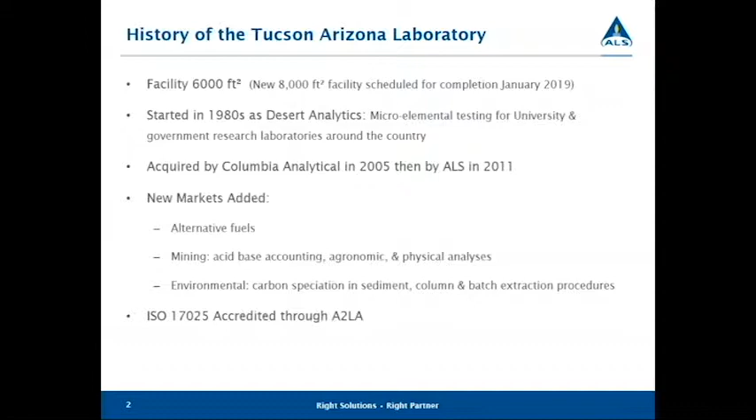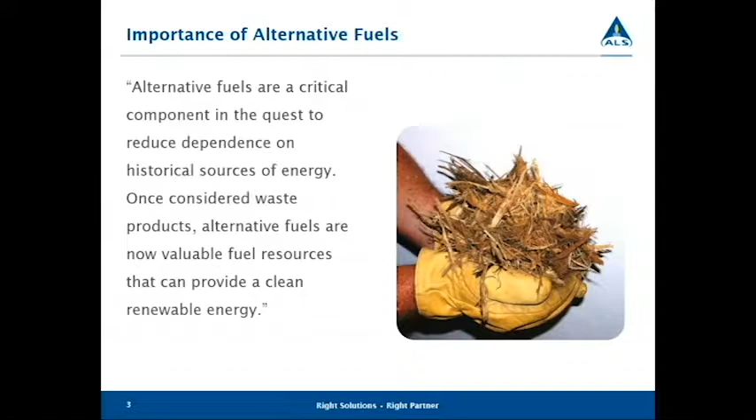Well, first of all, the importance of alternative fuels. You probably hear about this on the news all the time, but alternative fuels are really critical to reducing dependence on historical sources of energy like gas and coal and hydroelectric. One of the benefits of alternative fuels is they were once considered a waste product, but now they're being used in a productive way. Another thing is they're considered a clean, renewable energy. In the case of biomass, even though when it burns it gives off carbon dioxide and particulates, the new material that replaces the burned material is absorbing that carbon dioxide.

So here's a slide showing biomass to electricity. Biomass to electricity is only about 1 to 2% of the total electricity generated in the United States, but you can see the growth over the years. It really started taking off in the late 80s, early 90s. And you can see some of the other countries around the world, Germany, China, Brazil, Japan, are all starting to increase their generation of electricity by burning biomass.

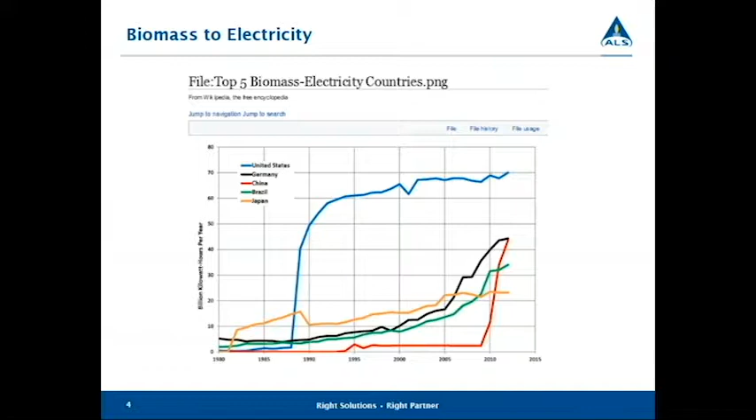Another way to generate electricity, and this isn't included in the biomass electrical generation, is municipal solid waste to energy. As of 2016, there were 71 plants. Most of these electrical plants are in the Northeast and Florida, and most of them are called mass burn plants. So they're not doing any sorting of the municipal solid waste that they get in. They have grappling hooks that just pile the waste material onto a moving conveyor belt that feeds the waste right into the furnace.

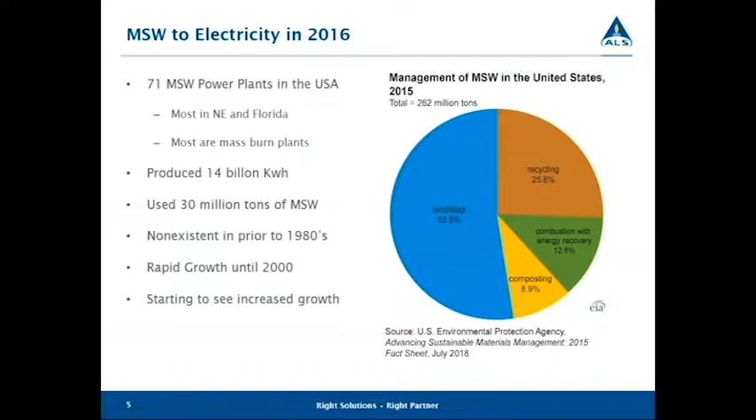In 2016, they produced 14 billion kilowatt hours of electricity. They consumed 30 million tons of solid waste. Basically, this industry was non-existent prior to 1980. It showed real rapid growth until 2000. It started to slow down, and they're starting to see an increase in growth here in the last couple of years.

So what is an alternative fuel? Basically, an alternative fuel is any carbon-based material that can be used as a fuel or used to create a fuel. And a lot of the different materials, there's forestry and agricultural waste products. Hog fuel is like wood chips. It's a slash from the process of cutting trees and using the pulp, or it's used for pulp and paper. It's that waste product. There's wood chips, crop waste, other things like chicken litter, dairy farm biosolids. We've even got nutshells in to test for their heating value production.

Another source of alternative fuels I mentioned earlier is municipal solid waste or industrial solid waste. And this will include, in addition to the municipal solid waste, the trash, it includes tires, manufacturing waste materials, plastics, paper, sludge. And then for the pulp and paper industry, a big one is black liquor. There's also another source that's dedicated energy crops. They're starting to become more popular. Palm oil is real popular in countries that are in the tropical zone.

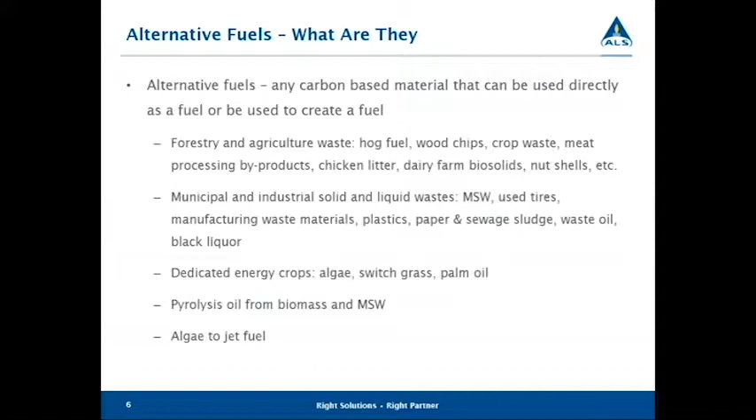The industries we served, the biggest one is pulp and paper industry. They've been using alternative fuels for many, many years. Their process called the kraft process is really good for using alternative fuels. Their primary use is to burn waste wood and other wood products for heat generation for boilers.

Cement manufacturers are another one that really are starting to use a lot more alternative fuels. And a good example there is they'll use tires, and they use a whole tire, and they get two benefits from that. They get the heat value, the high BTU from the tire that's burning, and then they also get the steel that's in a tire that's used in making clinkers for the cement. Some other ones are waste energy plants. We're seeing more and more of that work. Like I said earlier, most of those plants are back in the Northeast or in Florida.

The Tucson lab, we also do a lot of work with government and private research labs, and we get this work from all over the world. Most of it comes in from the USA and Canada. We see work from Mexico, South America. Our sister lab in Hong Kong sends us in municipal solid waste samples on a regular basis.

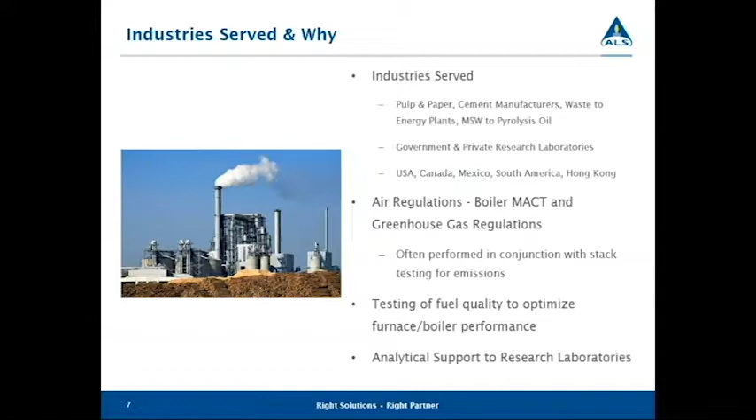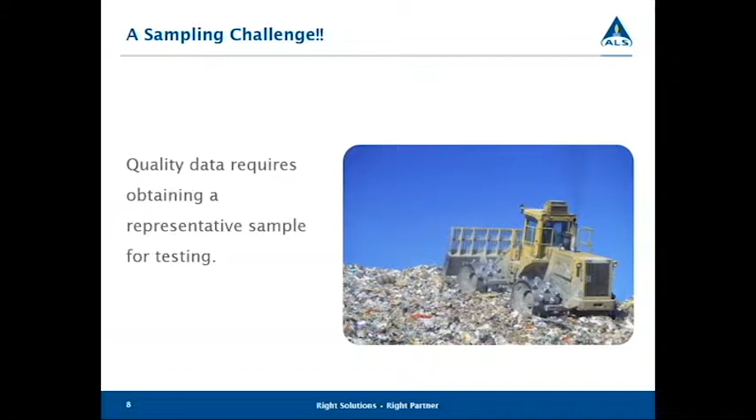Wood chips and hog fuel, they're a lot more homogeneous, and we don't quite have the sampling problems that we do with municipal solid waste, but it still requires that we prep fairly large samples and get those down to a very fine grain size so that we can analyze them.

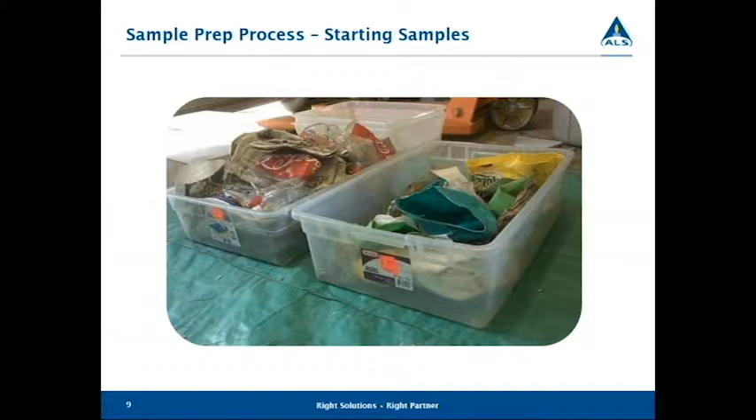So this would be a typical sample that we get in for municipal solid waste, and you can see it's a mixture of paper and plastics, and there could be food waste in there, chicken bones, whatever. So it's very heterogeneous, and it requires a lot of effort and time to prep these types of samples so that they give high quality data.

Here's one of the knife mills that we use in the prep process. This is a German mill. It's called a P25 knife mill, very heavy duty. This mill is very expensive. It's a $30,000 to $35,000 piece of equipment, and you can see the rotary with serrated knife edges on the rotating rotor right there.

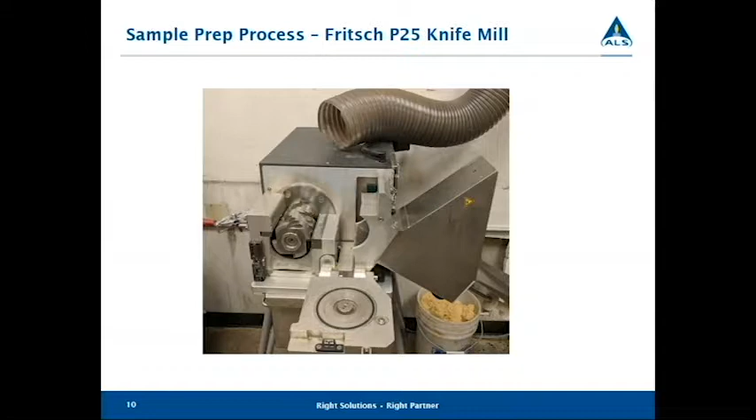So what we'll do is we'll take the samples, and if they're large pieces, we'll have to pre-cut them by hand, or sometimes we'll run them through a hammer mill. Samples that have plastic in them, we pre-freeze those with liquid nitrogen, and a lot of times we'll run those through a hammer mill to get the material reduced in size to about 10 millimeter.

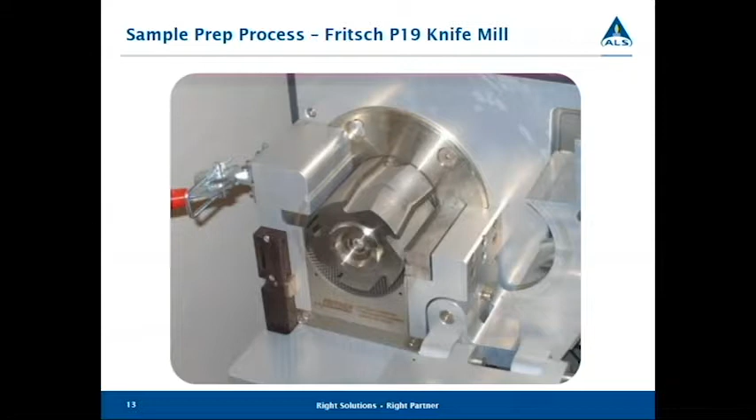So the next step that we do after we get the coarse grind is we go through a fine grind process, and we use another knife mill. This is the same manufacturer as the first one. It's a P19 mill, and this will take the material down to 1 to 2 millimeter in size.

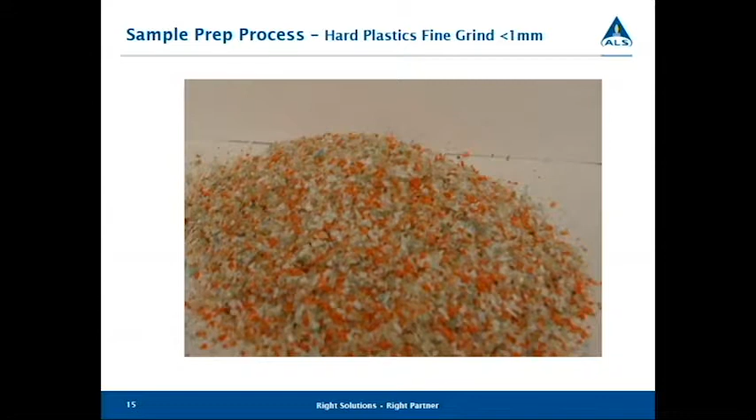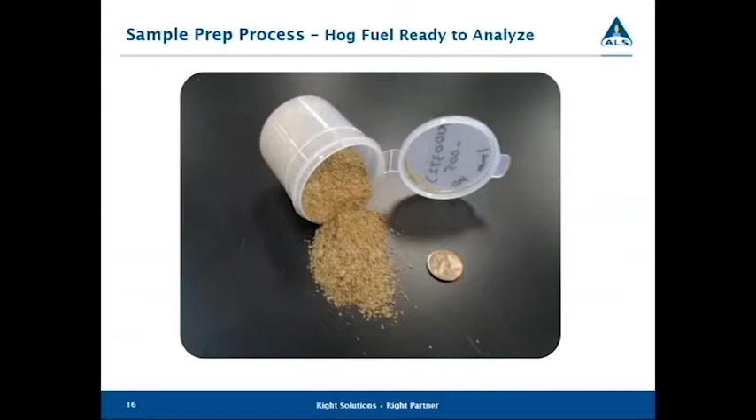So the problem that the heterogeneity creates is that when, say, we're doing a chlorine test and you have PVC pipe in there, it only takes 1 or 2 pieces of PVC pipe to really throw off your chlorine results. So we do a lot of duplicate analysis, repetitive analysis to make sure that the data is good and correct. Hog fuel or wood chips, they're the easiest and best to grind. Here's an example of a hog fuel that's less than 1 millimeter, and it's ready for analysis.

So the analytical process, there's 2 basic areas that we're testing the samples, and one of them is for the fuel quality, and this information is needed to determine how well the material is going to act as a fuel, the BTU values, the moisture content, the ash content, and then we do some other tests that help determine if the ash is going to be a sticky ash or have a low fusibility.

So the first test and the primary test we do is heating value, and this is performed on a bomb calorimeter. The old systems weren't automated like this. This is fully automated, and it's very, very accurate. Typically, our QC results on this instrument are 99 to 101% recovery. They're very, very accurate.

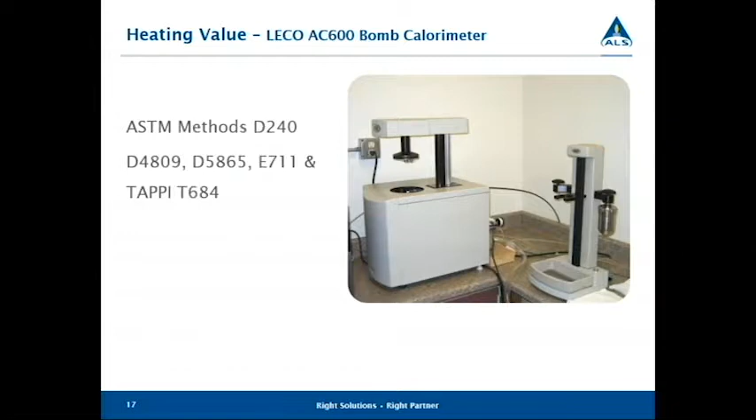The next instrument that we use is a thermal gravimetric analyzer. And this unit is specifically for fuels. And from this instrument, we can do proximate and other gravimetric analysis. Proximate is a term that includes moisture, volatile matter, fixed carbon, and ash. And then some of the other analysis that we do is loss on drying. We can also use this instrument to determine free moisture, inherent moisture, different types of loss on ignition at different temperatures. So it's a very versatile instrument.

Basically, it works on the principle of you have the small crucibles in there that we load up with 1 gram. The crucibles are pre-weighed by the instrument. We take the crucible out, add the sample, replace it back into the furnace. And there's actually a balance inside that furnace that will weigh each of those crucibles in a repetitive circulating motion. So each sample will be weighed maybe 100 times during one of the analytical processes.

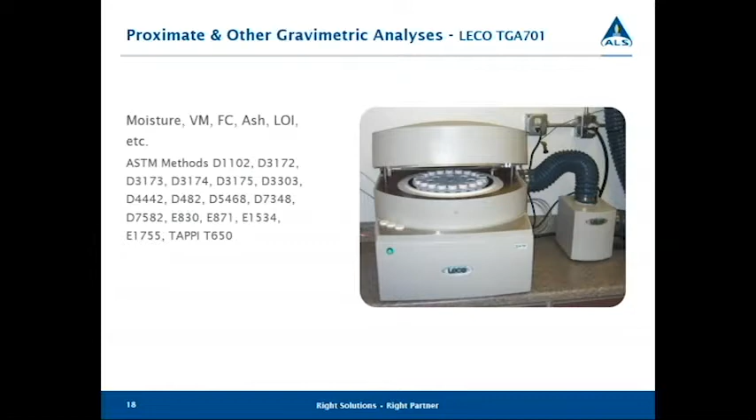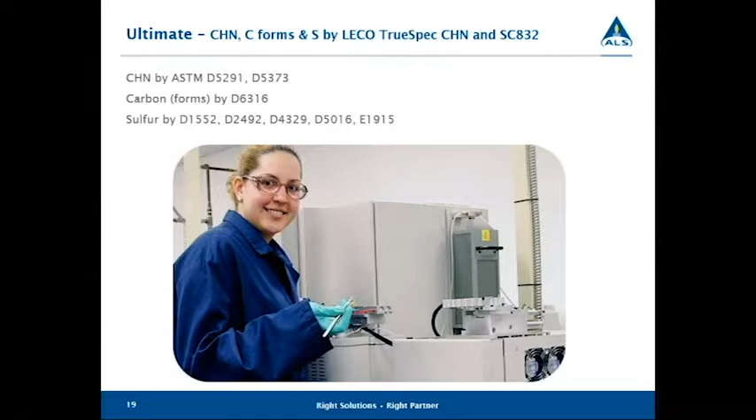So the next type of analysis that we typically perform on alternative fuels is for environmental analysis that are performed following various regulations. The main one that we follow for that work is Boiler MACT regulations. And Boiler MACT is a series of regulations that require users of different fuel sources to test for mercury, chlorine, and what are called select metals, total select metals. And I'm going to go through and show you each of the instruments that we use on those tests and the methods that the test is being performed under.

So for mercury analysis, we have a Nippon MA 3000 mercury analyzer. It's made in Japan, and this is different than your normal environmental mercury analyzer. The principle that it works under is high temperature combustion at 950 degrees. The gases are trapped on a gold amalgamation tube, and then that tube is heated up to release the mercury, and the mercury measurement is done by atomic absorption. It's a very, very sensitive instrument.

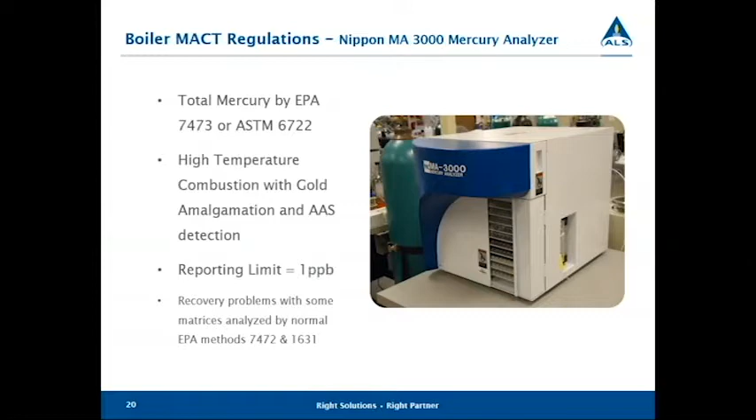On a solid sample, say we run 20 to 30 milligrams of material, we have a reporting limit of 1 ppb. What makes this method so good for the type of samples that we're analyzing is that the normal environmental methods are not able to get full recovery of the mercury that may be tied up in the plastic or the rubber matrix of the sample. And so they're going to result in a low recovery of your mercury. Those methods include EPA 7472 and 1631. Now for wood chips and sludge and other easily digested samples, those methods work real good. But any samples that have plastics or rubber in them, the mercury really needs to be done by the combustion method.

Another test that we do for the Boiler MACT regulations is total halogens and primarily total chlorine. This is an older method that involves combusting the sample in an oxygen bomb. The sample's weighed out. There's a small amount of scrubber solution put inside the bomb. The bomb is closed up, sealed, and then it's charged with 30 atmospheres of oxygen. You can't really see it very well, but there's a fuse wire that goes from the two electrodes into the sample. And the sample's combusted, and any chlorine or halogens in that sample are going to turn into a gaseous form. They're going to be absorbed by the scrubber solution.

And then after a set time, we release the pressure, collect the scrubber solution, and then analyze it by ion chromatography. And we can get reporting limits down into the 10 to 50 ppm range. I'm currently looking at an automated system for this, which involves a pyrolysis furnace, and then we'll have an automatic scrubber solution system that is analyzed by IC.

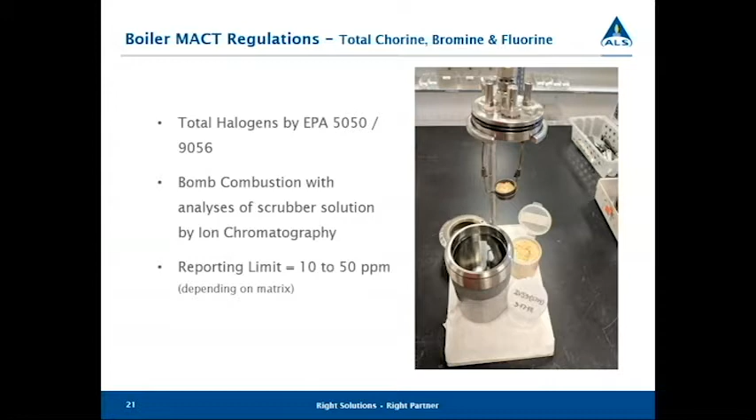Total select metals is the third group of analysis that are performed on alternative fuel samples for the Boiler MACT regs. And those metals, you can see them on the graph there. These are typically performed using environmental techniques. The digestion is either 3050 or 3051 microwave. Sometimes the samples will require ashing followed by an acid digestion to solubilize the metals. And then those digestates are analyzed by ICP or ICP-MS, 6010C or 6020A.

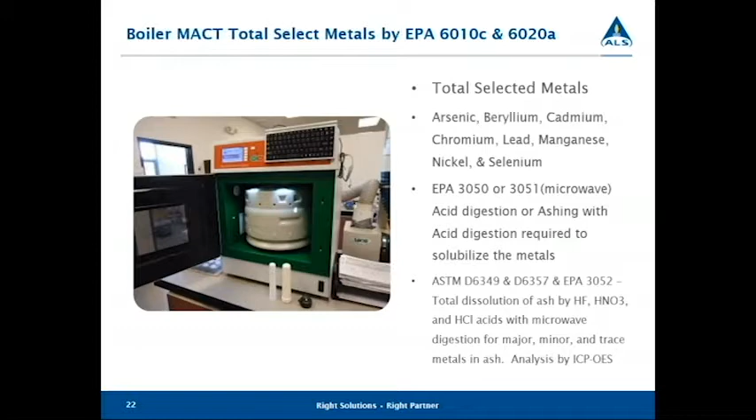Some other tests that we can perform on the samples are actual fuel analysis for heavy metals. And those typically involve doing a total dissolution of the ash material using HF, nitric acid, hydrochloric acid with a microwave digestion system. The microwave is shown in the picture there. And the metals that we do for these methods are called major, minor, and trace metals in ash. And analysis is by ICP-OES.

There's another type of material or group of regulations that alternative fuels fall under, and that's called the non-hazardous secondary materials. And they're basically solid waste that's burned as an alternative fuel, or in the case of like cement manufacturers, it's burned as a fuel and it's used in ingredients in the process of making cement. This is primarily directed at cement manufacturers or really any manufacturing firm that's using solid waste, non-hazardous solid waste as a fuel to heat boilers or to generate electricity.

The samples can be anything that burns that is non-hazardous. And over the years, we have gotten some of the strangest samples. We've gotten bags of money, shredded money. We've gotten toilet seats. There was a cement manufacturer that was going to receive thousands of toilet seats. I don't know where they came from, but they wanted that tested, and other weird things like that.

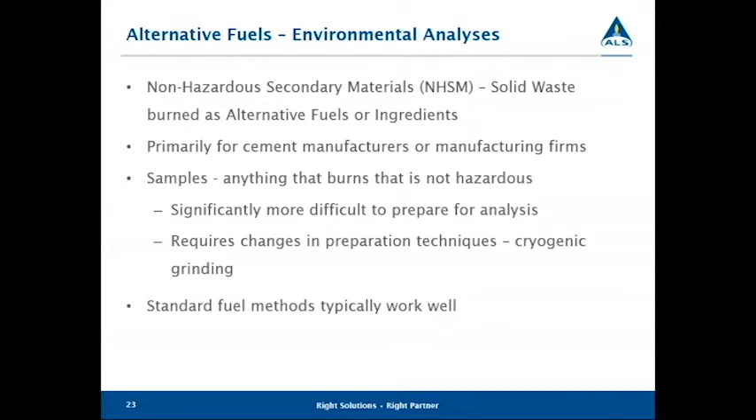The preparation process on these, it's really difficult sometimes, and it's very time consuming on some of these unique samples. And typically most of them will require cryogenic grinding, which means that we first freeze the sample with liquid nitrogen before we grind it. For the fuel quality analysis, the standard fuel methods work very well with these types of samples.

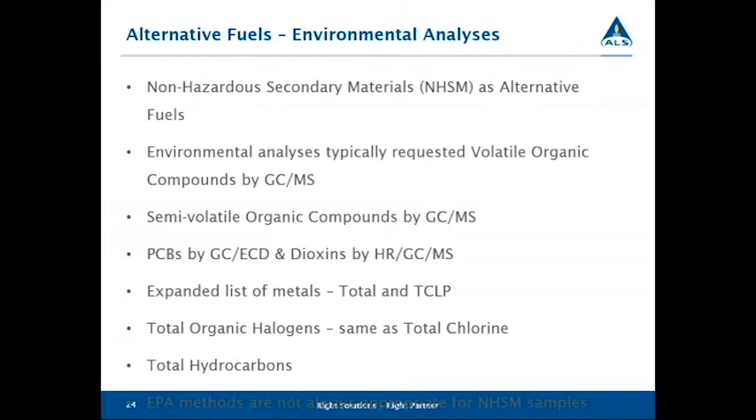There's also, for the non-hazardous secondary materials, typically a set of environmental analyses that are required. And those include volatile organic compounds by GCMS, semi-volatiles by GCMS, PCBs, dioxins. There's an expanded list of metals for both total and TCLP. And then we also do the total organic halogens. It's the same as the chlorine test that we use for the fuel. And then also total hydrocarbons. And this list can vary depending on the material that's being used as a non-hazardous secondary material. It also depends on the matrix, what that fuel or what that material is made of.

So as a recap, the alternative fuel testing market is really pretty small. It's specialized. There's only a few labs that perform these types of tests. They're usually small labs. Like I said earlier, the ALS Tucson lab is the smallest of the ALS environmental labs in the USA. We have about 12 to 15 people working. So they're very specialized. It's not a big market. The market is seeing modest growth over the years, and that kind of goes in line with increased electrical generation from both biomass and

municipal solid waste. The instruments that we use, they're basically the same that are found in coal testing laboratories. The biggest difference is the sample preparation equipment that we get. They're highly specialized, they're very expensive, and again, the sample prep process on a lot of these samples is highly involved, and it really is critical in obtaining accurate and precise data. We spend a lot of time on prep. Sometimes it's more than what the actual analysis is, both in time and cost. So that's basically the information on alternative fuel testing.